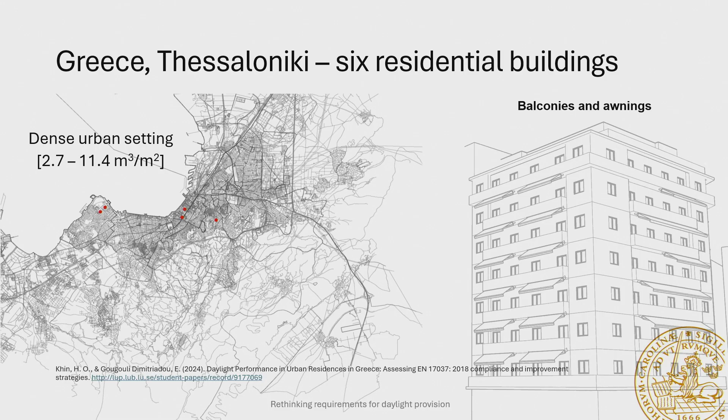The buildings that they were testing were in different urban densities in Thessaloniki. They looked quite similar, I would say. Those blocks have been built between the 80s and 5 years ago, I think, for the newest one. They have balconies, they have awnings, although we did not simulate awnings to make things more comparable. So we excluded shading from our simulations, even for the other cases. Before the results, it's worth saying that, similarly to what Claudia, Helen and Paul have been mentioning, in Greece, like in most European countries, daylight is regulated by a simple geometrical approach, window to floor area ratio.

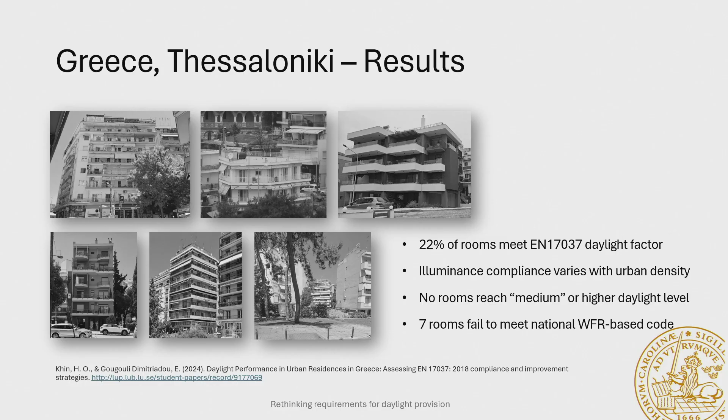What happens if we apply the European standard instead? Well, only 22% of the rooms we had comply with the minimum requirements for daylight factor. When it comes to the illuminance-based path, the compliance is a little bit higher and largely depends on the urban density. So we found compliance rates between 10 and 60, 70%, I would say. None of the rooms we had could comply with the medium level of recommendation from the daylight standard, which was quite disappointing, I would say.

Then we moved to Turkey. Same approach, 5 buildings. This time they are located in Izmir, and we have roughly 100 regularly occupied residential rooms. Here I got help from Ecenur Kuru, a doctoral student from Yaşar University, whom I would like to thank for the work there. She did a very detailed model with the surroundings of those buildings, real existing buildings again,

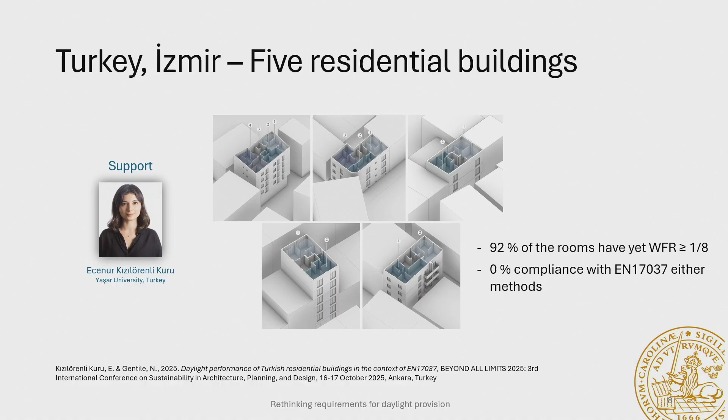ran the simulation. Again, even in Turkey, window to floor area ratio is the requirement for the code. And by the way, she informed me that this has been dropped also, which is quite worrying. But I want you to keep in mind what is happening outside our world here. Running the simulation, 0% compliance with either daylight factor or illuminance-based method for a combination of urban density and shape of the room. Windows, they were pretty much okay, I would say.

Then we moved to, by far, the biggest project or the biggest analysis that we did. It's for Sweden. In this case, we had 30 buildings, more than 3,500 daylit rooms spread across Sweden, different building forms, different urban densities. They represent very well the whole Swedish building stock, and we know that because we did some proper survey.

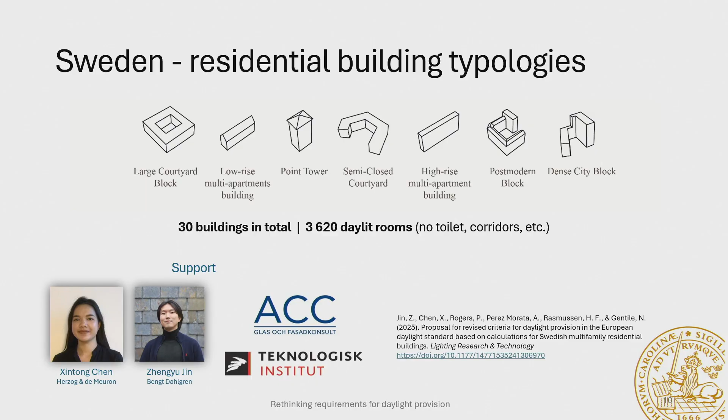And the buildings themselves are taken from a larger sample of 110 buildings that was produced some years ago by some colleagues, Iason Bournas, and we took a selection of that, ran simulations together with Helle Paul, Angel Perez Morata from ACC Glass, and two very excellent master students that we had, Xintong and Zhengyu from Lund University. Same approach, best practice daylight modeling, a lot of detailing there, surroundings, and we compared the compliance rate with the European standard and with the national building code.

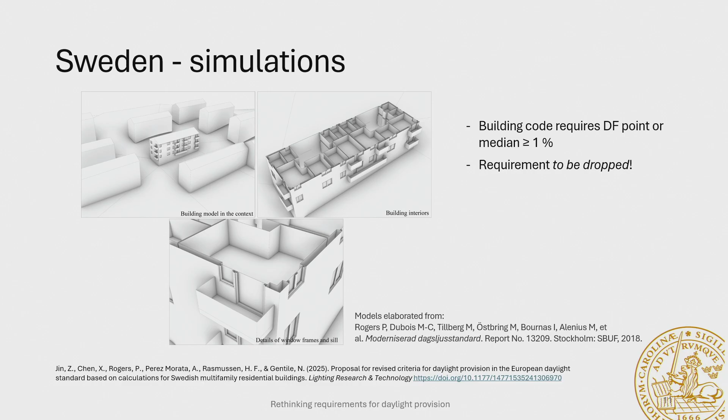The national building code in Sweden was quite advanced, let me say it was, speaking in the past, requiring a daylight factor of 1% point or median, a requirement that is going to be dropped for a more qualitative approach. So things are changing and not for the good. So the whole thing here for us was, okay, we have to put ourselves there again and prompt and push for daylight.

Results, now you know the story, how it goes. 16% compliance rate with minimum requirements, daylight factor path. 33% compliance with the illuminance-based path. That's already quite interesting. We knew already, but there is a little bit of misalignment between the two paths.

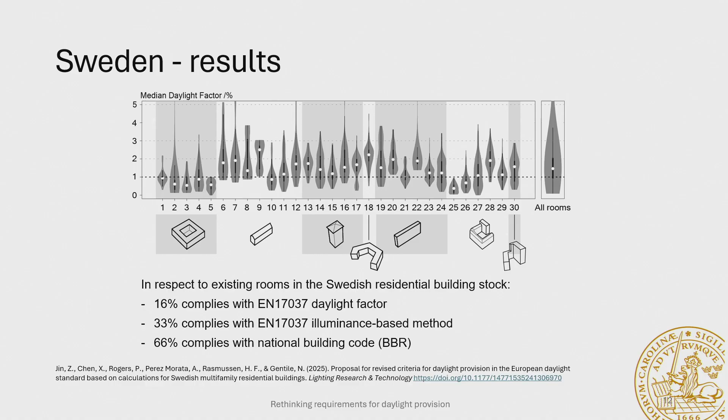Another interesting result, we also ran compliance rate with LEED. You know that LEED is a voluntary certification scheme that aims for excellence. And the compliance rate with LEED is exactly the same as the minimum level of the European standard illuminance-based method. So this tells us that it's quite ambitious, the standard, in that sense. 66% compliance with the National Building Code daylight factor. And of course, it's not 100% because some of the buildings were built before the building code was in place.

So, what's the message here? Well, we think, I'm speaking in plural here, that the European standard describes adequate daylight provision very well. We know what good daylighting is. However, we should acknowledge that at the moment, for much of what has been built, the criteria are a little bit too ambitious in a way.

So a proposal could be to formulate alternative targets that are more aligned with practice, what is out there, and probably decouple those from the definition of quality or quality benchmarks. So saying basically, okay, the lower targets that we are proposing do not give good daylighting, but we acknowledge that some buildings do exist and they should be mentioned.

What's the reason there? The reason is that if we acknowledge that some buildings exist, it's perhaps easier for the standard to be adopted in building codes, rather than saying, okay, anything that is below this quality benchmark does not exist, is not worth staying there.

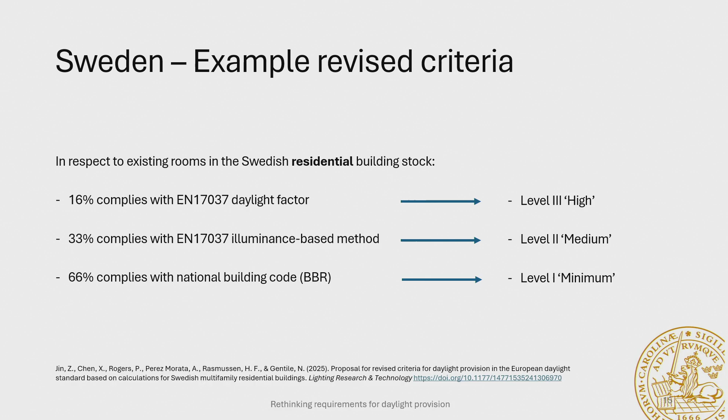33%, the compliance rate was the same as LEED with the illuminance-based method. So if it is like LEED, we can say, well, that's pretty good daylighting, so we call it the medium level. And what we have, the status quo, the current compliance rate can be called the minimum level, so the status quo. And then we thought of the residential stock only. Again, this is only an example. Just take it for what it is.

And we said, okay, if you are in a residential case, perhaps uniformity of illuminance inside the space is a little bit less important than in office spaces, right? This was more like a logical deduction rather than research informed. Then we said probably we can avoid using the current approach in the standard, which has target minimum requirements, which is basically another way to define uniformity, and rather give just a single target based either on illuminance or

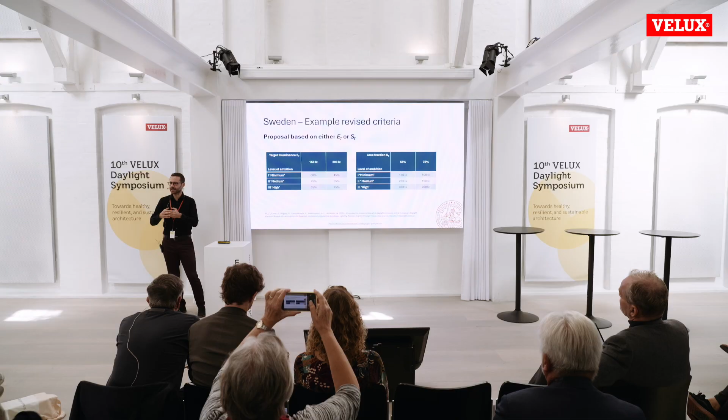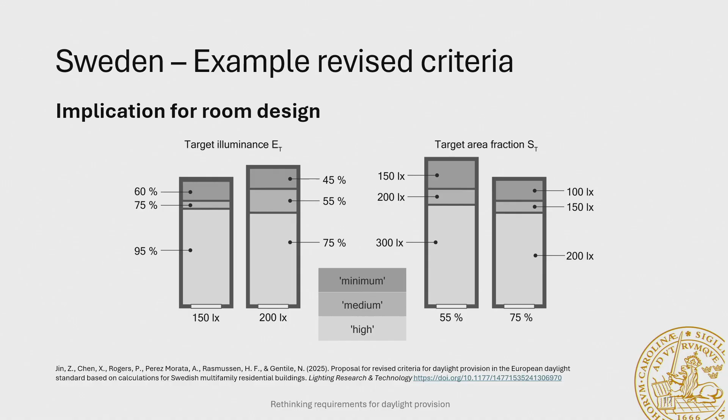on targeted area fraction. We did a lot of simulation combinations step by step there, and basically what we did was to find the combinations of illuminance and targeted area fraction that would reach the compliance rate that we had before. And there were different combinations, and we tried to see how those combinations would result in potential room design. And now it can perhaps be overwhelming in a short presentation, but we ended up with 4 different potential proposals to discuss together that were providing exactly the same compliance rate that we were looking for.

And depending on the proposal, based on targeted illuminance or targeted area fraction, a hypothetical shoebox room would result in maybe higher depth or a little bit more shallow. It depends a little bit. So the discussion there was more not thinking about daylight per se, but how would that be perceived in practice? Of course, if we go for this solution, the third one, which allows deeper rooms, of course, building developers would be happier, but that would result in very low uniformity. So what does it mean in terms of daylight quality and so on?

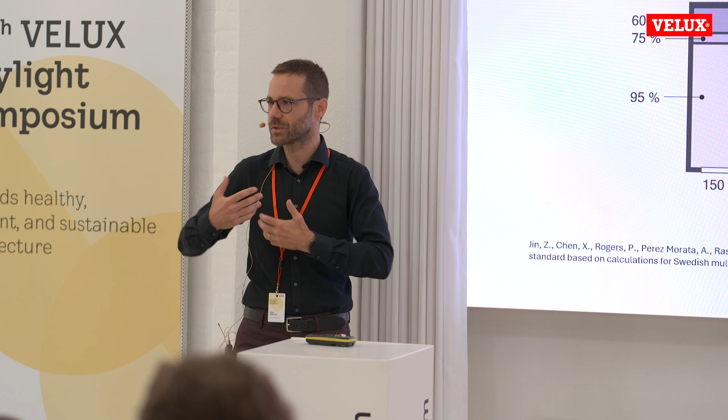Again, as someone said in a previous presentation, I don't have the answer, but it was the way in which we started to discuss things, and which I think was quite important to at least start again a discussion and make the daylight standard, I said it, make it possible. So make the daylight standard have the possibility to be digested, if I can use the term, by practitioners, by legislators, and finally enter slowly the building code so that daylight and daylight design can slowly enter into the routine of building design.